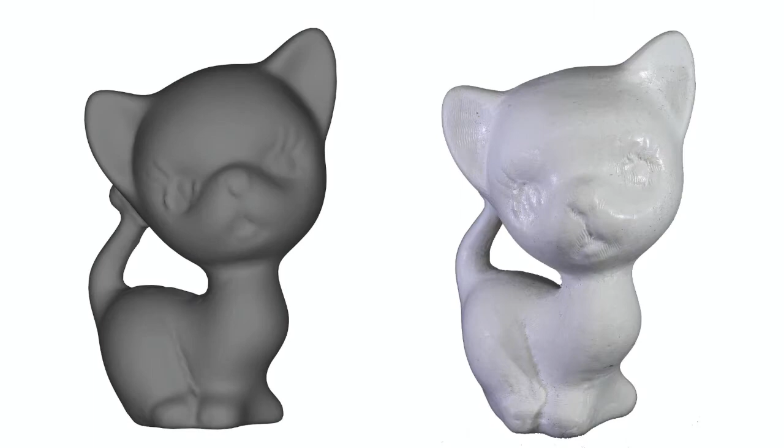We present a novel geometry processing pipeline to plan the fabrication of complex shapes from a single block of material using 4-axis CNC milling machines. This setup extends classical 3-axis CNC machining with an extra degree of freedom to rotate the object around a fixed axis. Given an input model, we first remove the high-frequency details, in order to have a smoother surface to operate on.

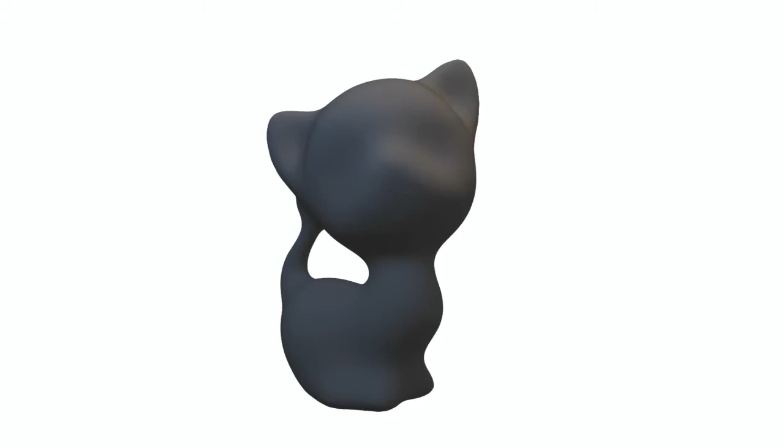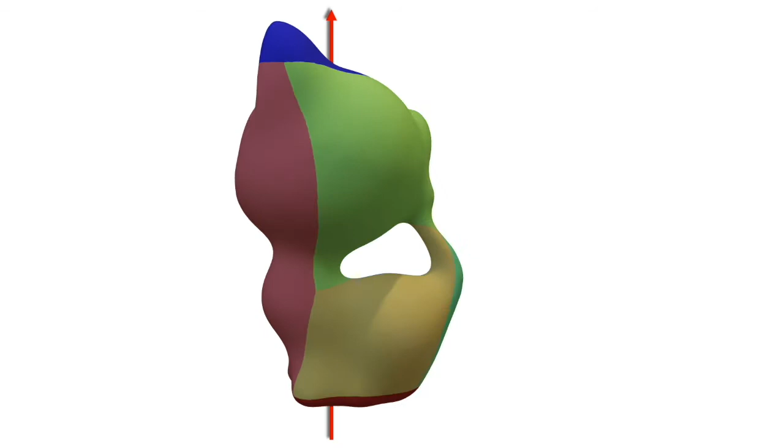Then, we identify the rotation axis that maximizes the overall fabrication accuracy. We find two height field regions at the rotation axis extremities that will be used to secure the block on the rotation tool. For the remaining portion of the mesh, we find a segmentation into a set of height fields whose principal directions are orthogonal to the rotation axis. We use a graph cut approach that balances the manufacturing quality and the total number of patches.

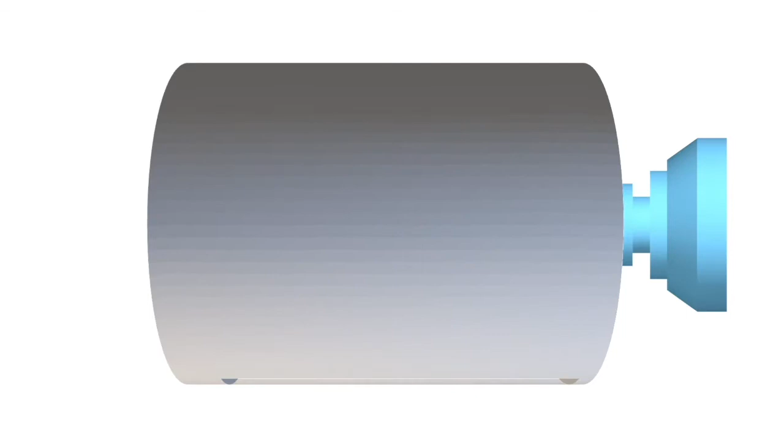We reintroduce the high-frequency details, enforcing the height field constraints for each chart. These portions will be fabricated from different directions generated by the 4th-axis rotation. We produce a sequence of meshes ready to be processed by any off-the-shelf software for the 3-axis tool path generation.

Then, the block is disconnected from the rotation tool and the fabrication of the top and bottom regions of the mesh is performed. The mold of an extremity is used to secure and align the block for the last manufacturing step.

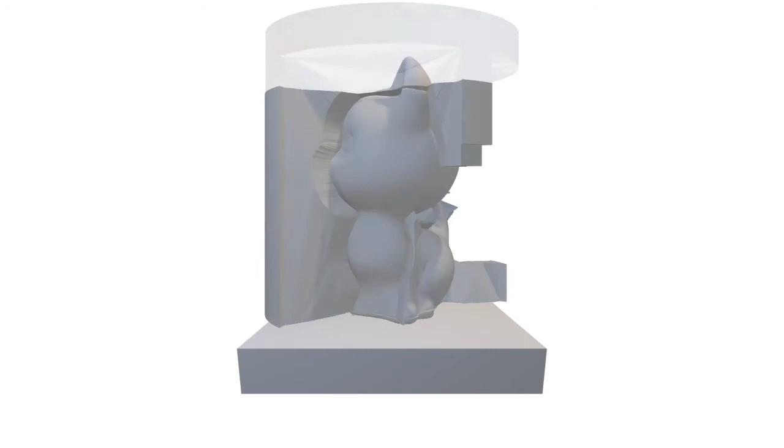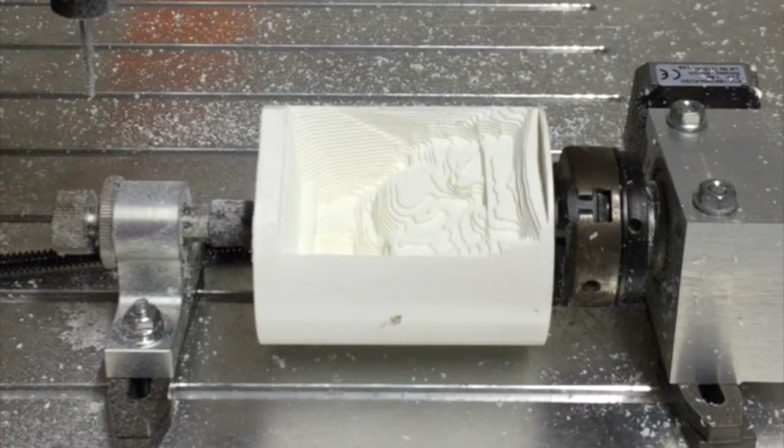We show an example of a real manufacturing process. We first secure our block to the rotation tool and we perform the fabrication along the directions obtained by the 4th-axis rotation.

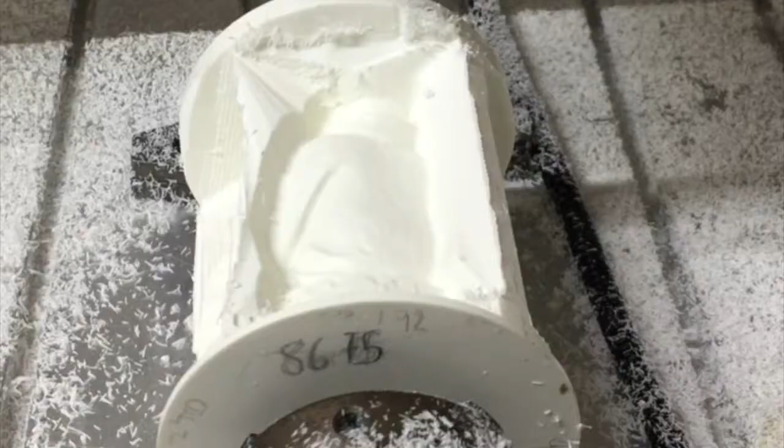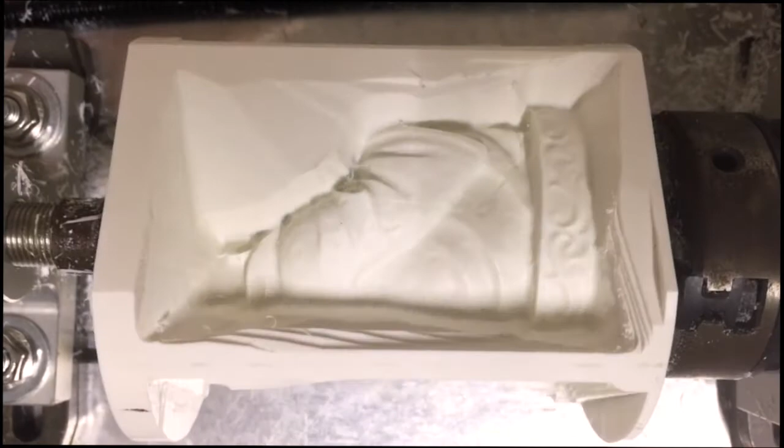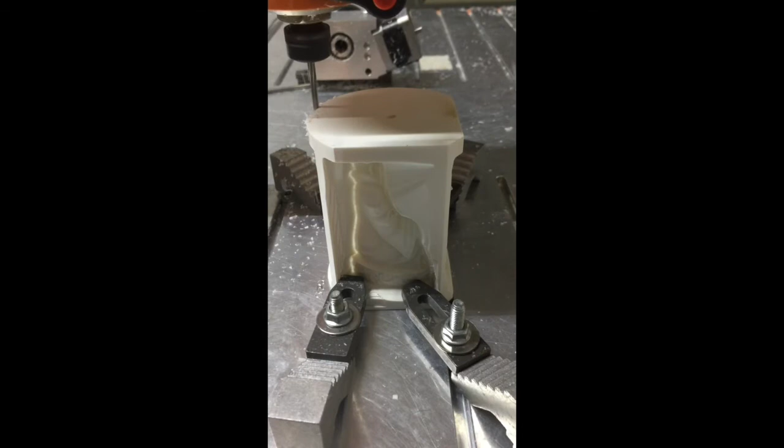Finally, we separately fabricate the top and bottom parts of the model. We present some results obtained with our pipeline.